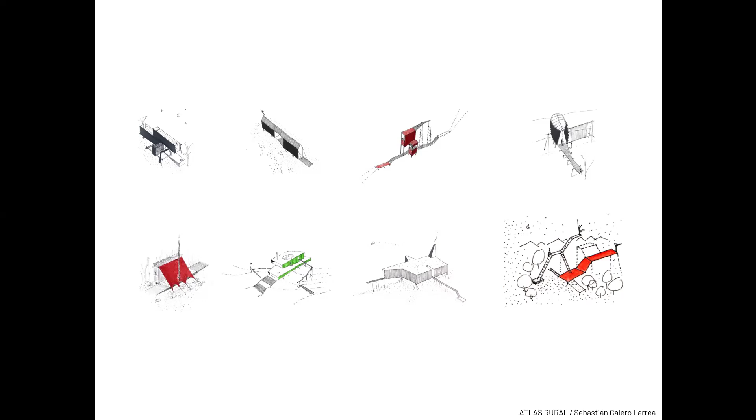a lot of concepts and strategies that I can use in the future. Finally a project comes true, but it's important to understand that every process has a time, and that's the field where I'm moving right now: small scale projects, trying to understand the combination of materials,

trying to be honest with resources and with the economy. This is a project that I built 7 years ago, in which I try to combine, for example, metal with bricks, trying to understand how the object is touching the ground, and how we can integrate nature with architecture. That's the field where I move right now.

But also, I think it's important to compare different contexts, and how people understand architecture from different contexts. On this road that I travel all the time from Quito to Guaranda, I can observe different typologies and architectures that for me are really important information for my work.

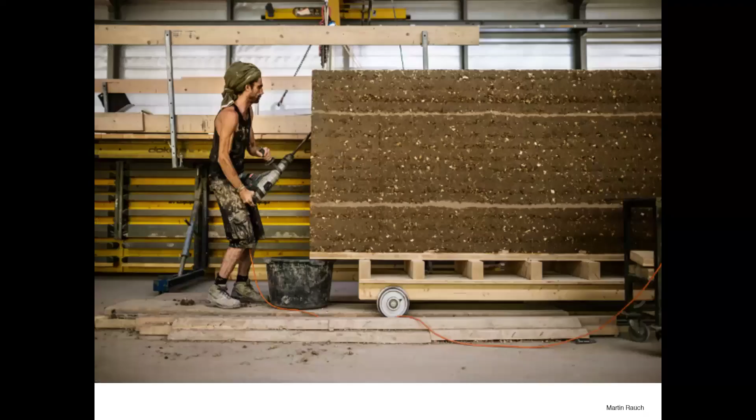There are also more technical references. For example, Martin Rauch is an Austrian architect who works with earth. He understands the industrialized process with earth, and the walls are produced in a factory and joined together like blocks.

In order to understand the meaning of vernacular architecture and how we translate some specific concepts, we created, with El Terreno, a vernacular architecture laboratory in which we try to work with communities and volunteers, and we have some specific cases I'd like to show you.

This is a small map to understand the concept of the highlands in Ecuador, Quito and Guaranda, maybe 230 kilometers apart. This is the road I'm showing you, along which I'm trying to compose an atlas, an album of objects and vernacular architecture.

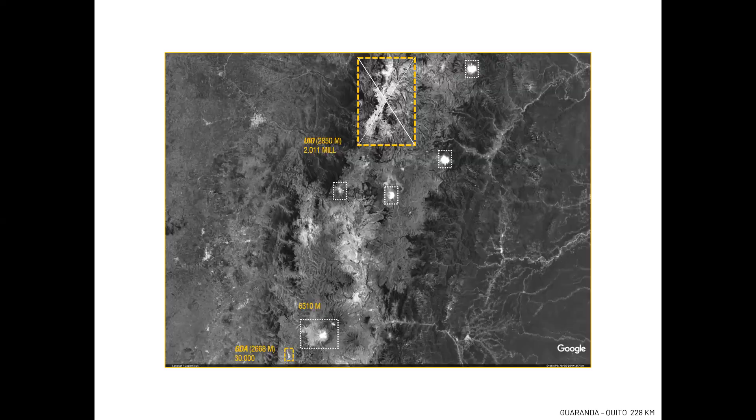Atandahua is a small community near Guaranda, where El Terreno is located. During the last few years we've been trying to map some architectures.

Sometimes these buildings are abandoned because of migration. There are a lot of infrastructures without services, like ruins in the landscape, and we're trying to convince the owners to fix some of these houses, because we understand that these architectures in the landscape have a lot of value.

But most of the time people don't value this architecture. It's treated like garbage, or people think only new architecture has validation. So we're trying to convince people that this architecture has a lot of value and is the memory of the place. That's our battle right now.

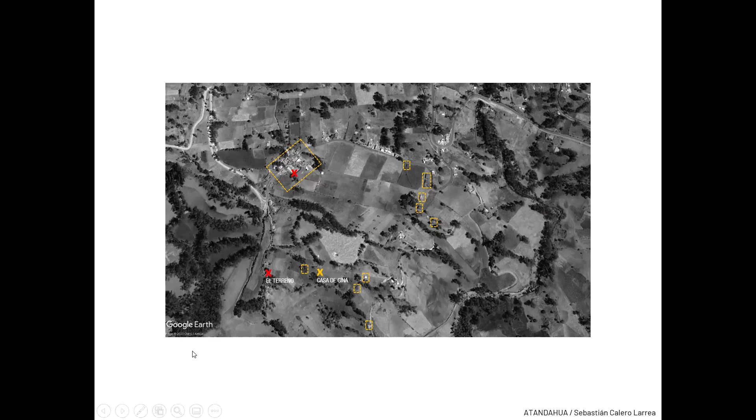We walk a lot in the landscape, as you can see. This is Atandahua. You can see the architecture located in the field, among a lot of crops. We walk, sometimes in groups, in order to recognize a lot of architectonic elements.

This was the first project we worked on, the main house at El Terreno. It was a 100-year-old house that had been abandoned, and all the structure was damaged.

The main part of the house was the boundaries, all made with earth. So we tried to rescue all the boundaries, and of course every house has a memory, a history, a lot of elements, a lot of skins, a lot of layers, a lot of parts that we must recognize in this process, because it's all information, and we must work with all these elements in the end.

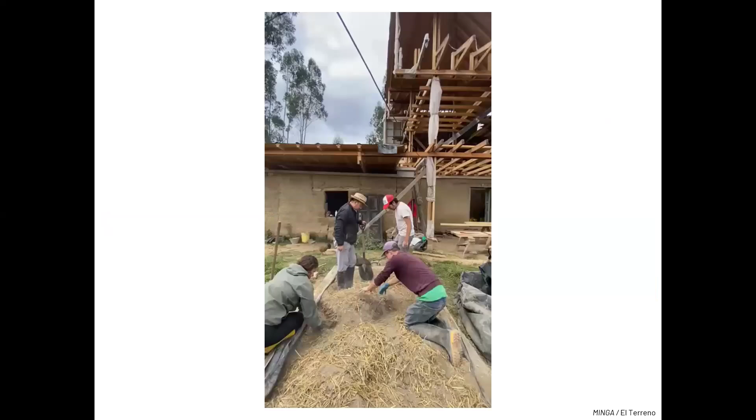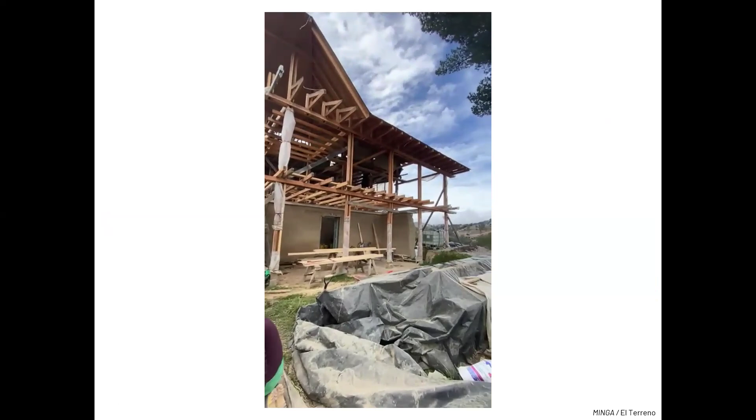That's the process when we work together with friends, with people from the community, with foreign volunteers, in order to understand the different processes of building a house. As you can see, the house is taking on proportion and scale, and we can see how the different materials are being combined.

This is almost the final result, in which we can see the different parts of the architecture: the old one, related to the earth, the rammed earth, and the new skeleton of the house, the new part that only touches some parts of the old house.

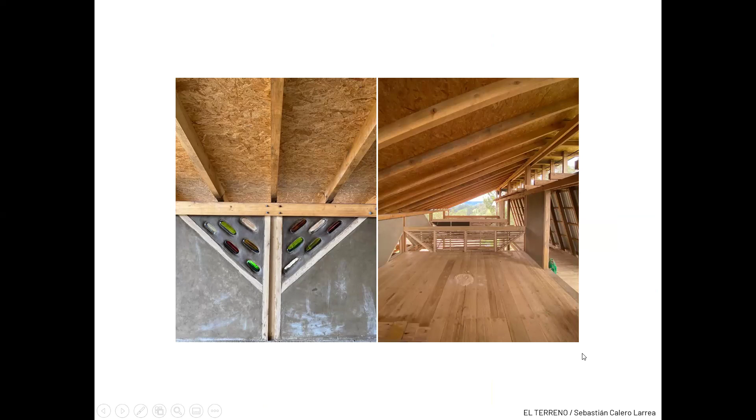Some examples of interior space, and also we try to understand more possibilities with materials. In this case, for example, bottles, and also understand the different skins of the walls, because a wall has different skins, and I think that's important because it's also related with comfort of the house.

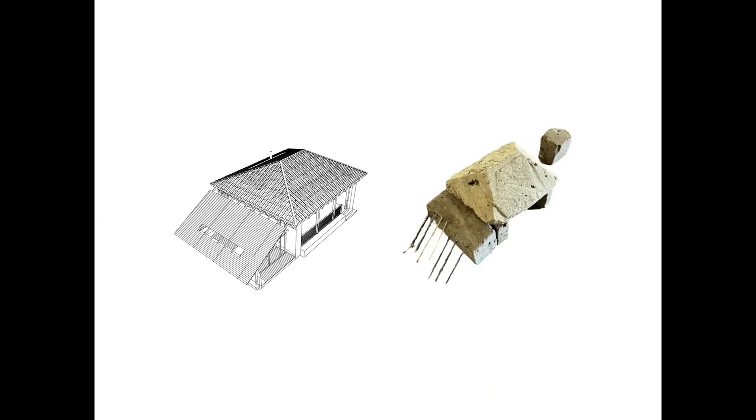This is almost, I think, the final result, because we haven't finished the final project yet, but we can see how we join another part, how we put light inside the spaces. This is another view.

Try to understand the different layers of the wall, and try to repair, try to fix all the walls also. This small balcony is in order to admire the Chimborazo, the different views of the landscape.

This is what's happening right now in the second floor. Small interventions with huge impact, I think that's the objective. Small actions, but big impact in the space or in the form sometimes.

We are really happy because it was really hard work trying to coordinate all the problems, all the economical resources, materials, manage all the people. It's not easy. So I think we created a really great team of workers, and the project has an amazing result.

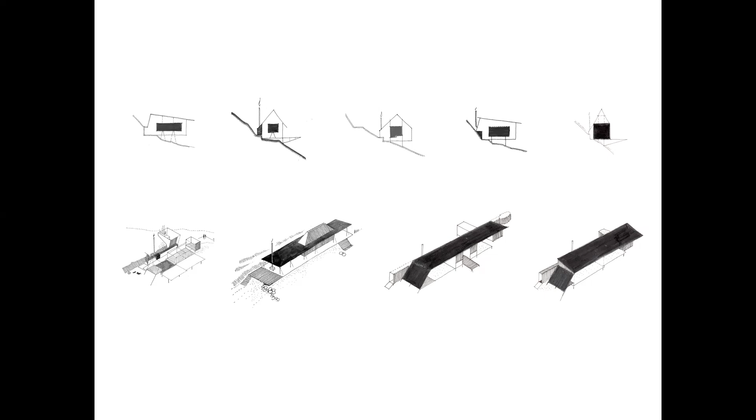The main idea of the project is trying to create a primitive space. That was the main idea, trying to disconnect from modernity, because in the place you don't have electricity, and you have water but not too much water. But the main objective is trying to create a primitive space for people that live in the city.

This is the final result. As I told you, we use materials from the sun, from this area, trying to understand another way of cooking, of sleeping, just to relax, and obviously all the time trying to integrate architecture with nature.

The final object is like an insect, sometimes it touches the earth, sometimes it doesn't touch the earth. Also, we recycled some elements, for example the chimney, we recycled this element.

And you can see how the project is part of the landscape. Big windows in order to understand light and the relationship between exterior and interior spaces.

And just to finalize my presentation, I would like to give you some conclusions. What I'm trying to do is not reproduce the architecture of the past. What I am trying to do is working with this memory, but trying to play with it, trying to create new games with this memory, trying to use these elements in order to understand new possibilities of architecture, but thinking about the present.

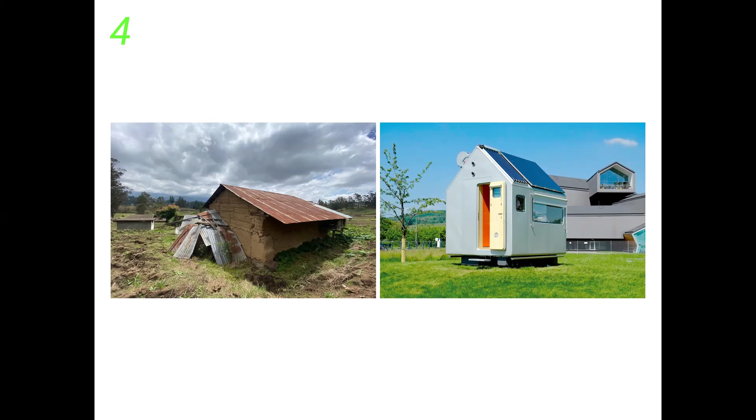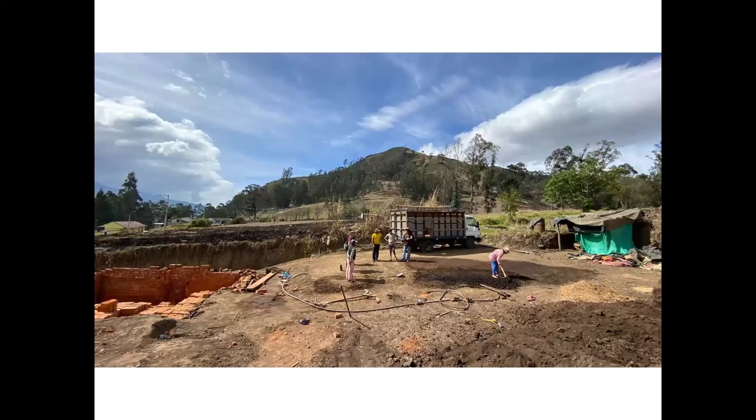And I think it's also important thinking about resources, materials. I think that's a really important aspect in sustainable architecture and vernacular architecture, because all is money - time is money, and materials also are money. And I think we should create new objects thinking about resources.

I think it's a really important aspect, at least in my profession, how we can introduce and respect nature in cities and in rural areas.

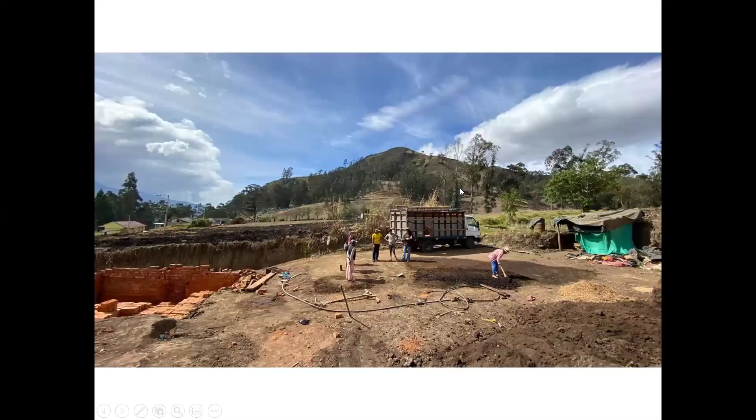Sebastian, can you tell us a little bit about your process of how you go through the analysis of an old building that you want to transform, and then what are the steps that you take in the design and the building process? Well, to be honest, I think every project has a personality.

Not every project is the same, I think it's a different case of study. In this case, for example, El Terreno, it was really important to try to understand the old architecture and what are the new possibilities to understand the new architecture.

In this case, as I told you, we have boundaries that we didn't want to touch. The boundaries are the memory of the house, and our challenge was to try to create a new architecture that combines with this old one.

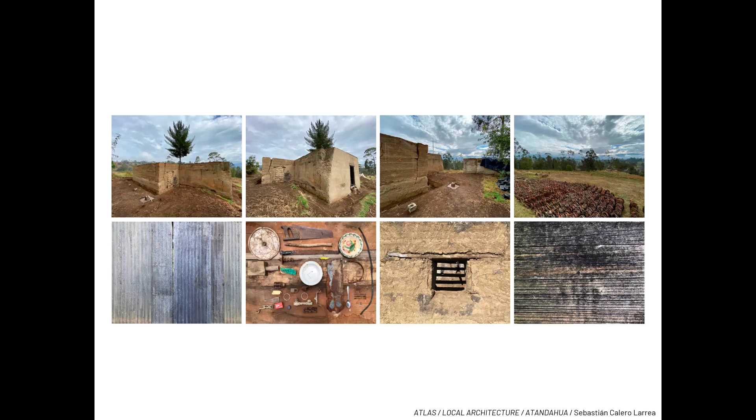In this part of the process, I think the second part, we take off all the clothes of the body in order to understand the main body of the project and the different skins, the different elements. Because these old houses have history, they have memory, they have information that sometimes we don't see. We must touch the house, we must touch the walls in order to understand the complexity of the project.

There's a third step, I think, in which I must talk with my client in order to understand necessities, in order to understand all the possibilities of the project, the scale of the project, the different dimensions with the space, how with this new skeleton we are satisfying all the necessities of my client.

And the big challenge of this project, as I told you, was trying to understand this new structure with the old one. The old structure was an irregular structure, which was really complicated to draw, to work there was really complicated, and how this new skeleton was able to create new spaces inside and a new form outside.

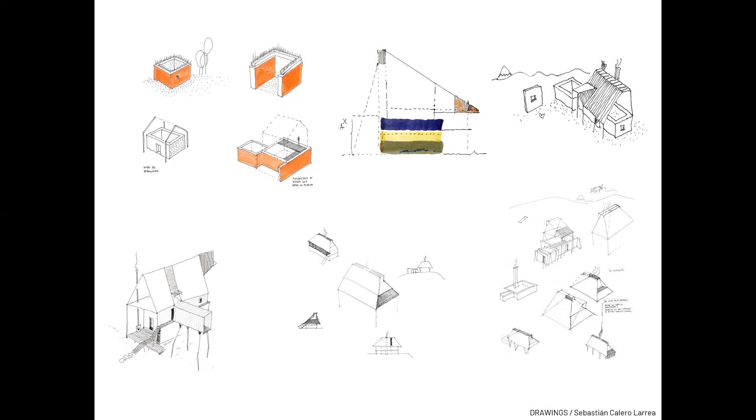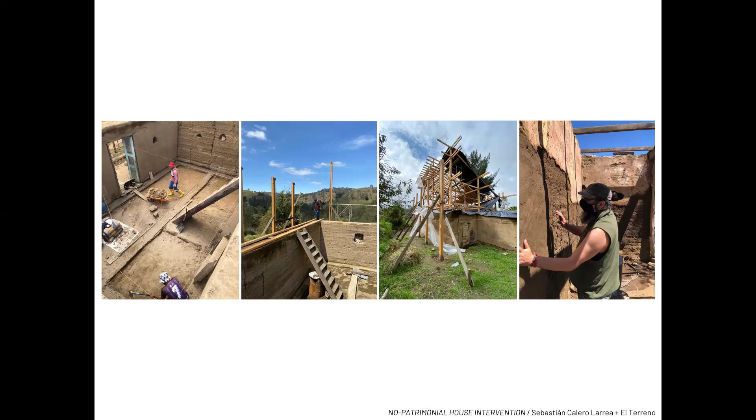You can see in the process, maybe there's also a process in which we must build the ideas with strategies and, for example, try to understand the empty space and how this new skeleton conforms the new architecture.

And that's the final result, how we are combining periods of time, an ancestral moment and a present moment, honesty with an architecture that doesn't want only a form, but it is an architecture that wants to invent new spaces inside.

It's like a magical box in which you have a lot of new spaces that sometimes you don't see. You must walk around and figure out all the different spaces.

What I'm trying to explain is that architectonic processes are not linear, they're sometimes really confused, organic processes that are all the time changing. I cannot explain all the projects in the same way because, as I told you, every project has a different moment, a different inspiration, different resources, different landscape. Every project is a different film, and every film has a different script.